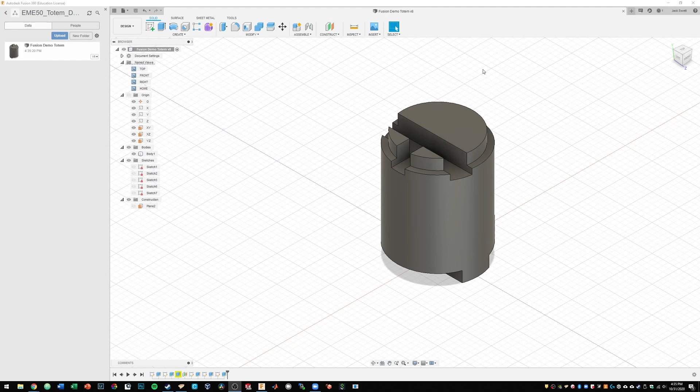We already have our part all set up, ready to go. Before we create the drawing, we know we want a north and south isometric view. Right now in our named views we have top, front, right, and our home view, which is actually a north end isometric view. However, we want to create a south end view, and we might want to use a slightly different isometric view as well, so in this case I'm going to use roughly this isometric view.

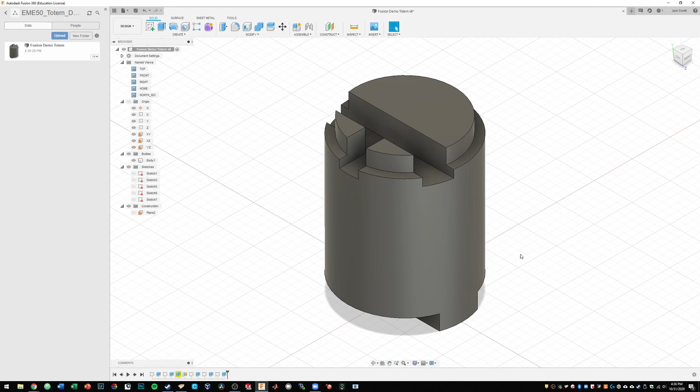To save this as a named view, we can go up here in the top right and click just this little blue corner, and that'll set us in a true isometric perspective. Now under named views we can right click, click new named view, and now we have this named view here. If we double click it, we can rename it to whatever we want. In this case, North ISO for the North Isometric view. You can also drag down and click the blue triangle down here to get us into our isometric perspective again.

Right click, new named view, double click, South ISO. Now we have our views set up.

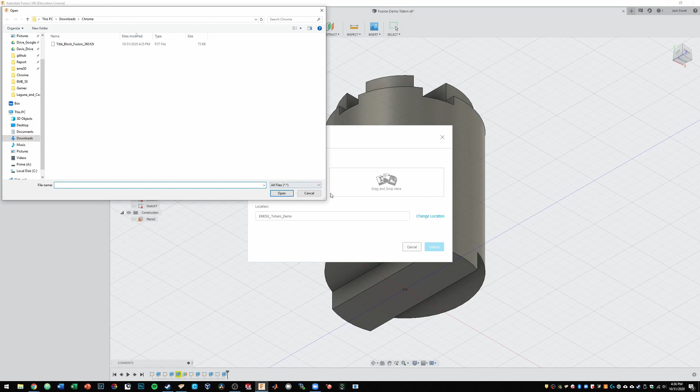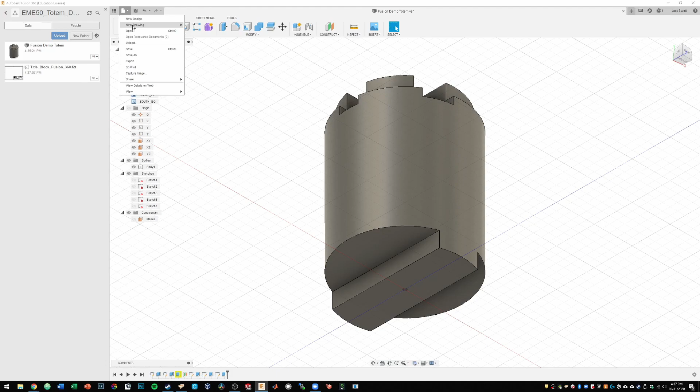It's time to import our template. We can open up the template that we will have downloaded, upload it. This uploads it to our project folder, so we can use it for anything in this project folder. Now you can see it here, that F2T file. Now if we go File, New Drawing from Design, under Template we want to select Title Block Fusion 360, hit Select, and you can see the standard units and sheet sizes taken care of for us.

Hit OK, and we end up here in our drawing. First thing we want to do is make sure we're on front, make sure we have visible and hidden edges selected, and we want to change our scale to 1:1.

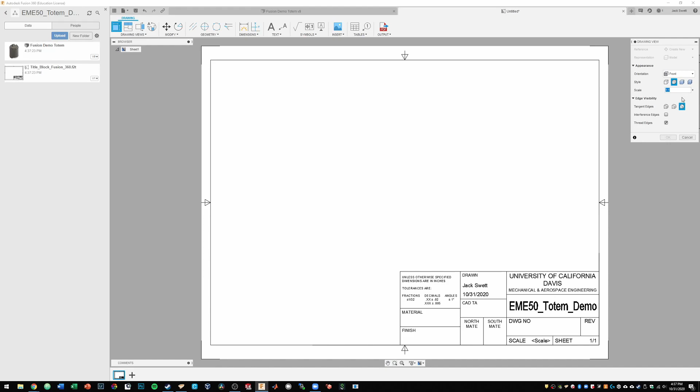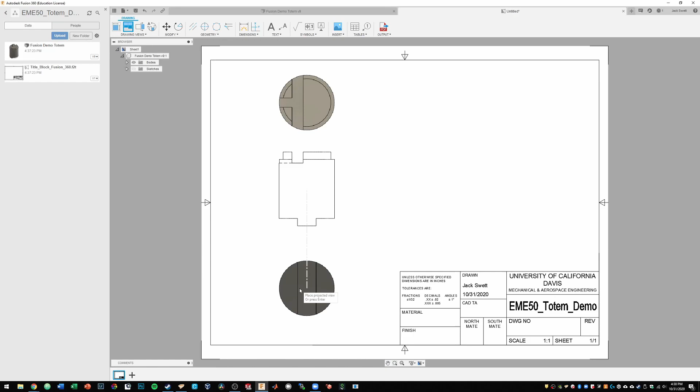Now we can plop down our view. You can see it looks good. Now we can go up here to projected view, or hit the letter P on the keyboard to get projected views. Click that view, and then just move your mouse up to get a north view, a south view, and then a side view. You can hit escape.

Now we want to add in our isometric views, so we can go back up, and from our model we can hit our north or south isometric view. Now you could have also just selected a southwest, southeast, northeast, northwest isometric view as well. However, I like having the named views as it just makes everything a little more clear.

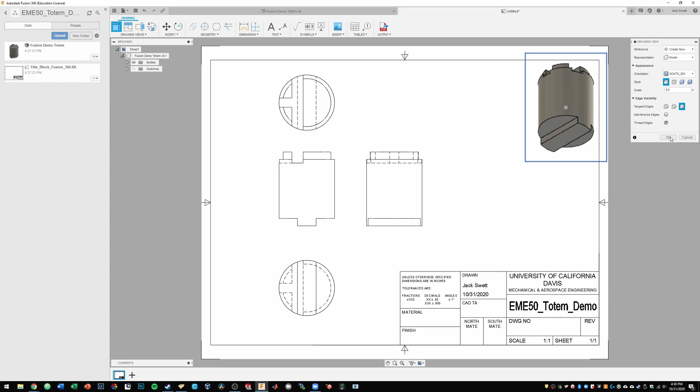So I'll take my south isometric view, and in this case for the isometric views we don't want to see any hidden lines, just to get an idea of what the overall part shape will look like. So we'll hit just visible edges, scale also 1:1. We'll put our south view up in the top right corner, and hit OK, and we'll do the exact same thing for the north view. We'll just line it up so that it's pretty closely lined up and hit OK. And now those are set.

Now we also see we have some hidden lines for features from the south end showing up on our north side, and likewise features from the north end showing up on the south end. And that just clutters things up a bit. So what we can do is right click this, hit Edit View, and from here, instead of having style from parent, we'll just click Visible Edges. We can close that and do the same for over here, Edit View, Visible Edges.

That cleans things up a bit, so now we can go ahead and start to fill out the dimensions and fill out our title block. To fill out the title block, it's pretty easy in Fusion 360. We can just double click it, and you can see there's already some placeholders for everything. So the material type, we'll double click and say 6061 T6 aluminum. Finish type, we'll just say none.

CAD TA name, you will enter whoever your CAD TA is. North and south mate, you'll enter whoever that is if you know it yet. Same with south mate. And your drawing number. And the revision that you're on.

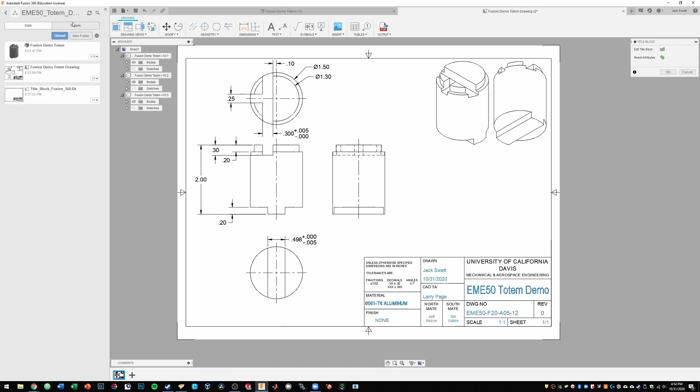Finally, if you want your name to not have any underscores in it, you can go in and edit your totem name here. Right now with the template, the way it's set up is it just defaults to the name of your project, but you can change it to whatever you want.

So once the title block's all filled out, you can select OK, and everything's good to go from there.

Now it's time to add some center marks and center lines. If we go up to center mark and click one of our circles, we can see that it doesn't have center marks extended all the way through the part, which is what we want in this case. If that happens in Fusion 360, the easiest way to get around it is to use center mark pattern.

When you select this, you can create a center mark, and I just move my mouse so it's up on top, vertical. Hit enter, and there we have it. Easy as that. Do the same thing down here. Now we have the center marks set.

For the center lines, we just want to click the outer sides of the cylinders, and you can see the center lines don't extend all the way through the part. We want them to, so we click the center line and drag the arrow on the end so it comes through the part for both the top and the bottom, making sure they're roughly equal. Now those are set.

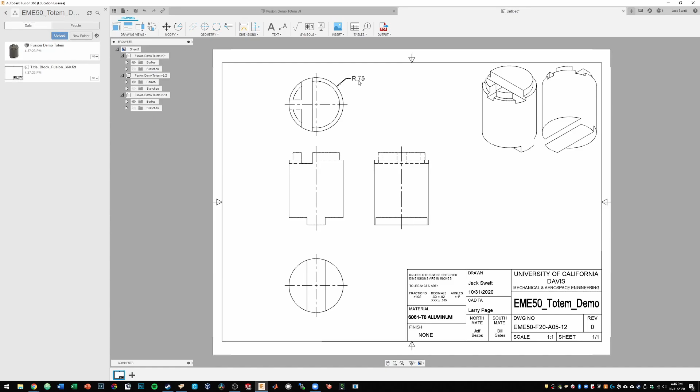When we come to dimension the outer edge of this totem piece, you can see that when we click it, we end up with this radius. Radius isn't really great for the outside diameter of the entire totem, and typically we only want to use it if we have less than about half a circle.

Instead of that dimension, we can come up here and hit diameter dimension. Regular dimension will just do what it thinks is best, but we can override that to a diameter dimension. We can click that and place it down. Same with this one.

Now you can see it's dropping the trailing zeros, which is an easy enough problem to fix. Down here at the bottom we have annotation settings, and we can display leading zeros and display trailing zeros. I'll just select display trailing zeros for this.

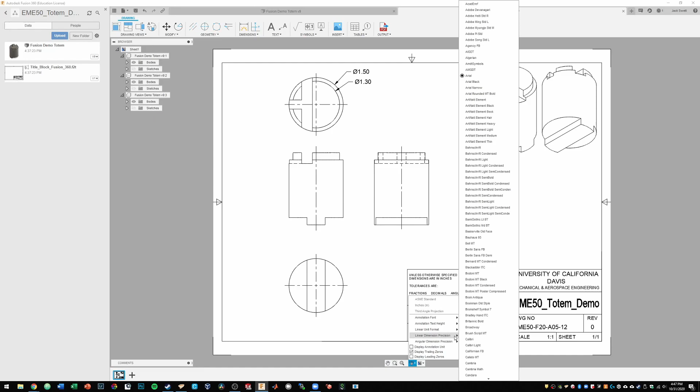If you find it's showing too many decimal places, we can go up here to linear dimension precision and select whatever we want - 3 decimal places, 2 decimal places, 1 decimal place, whatever we need. So that's how we can set that.

Now we just have to dimension the rest of our part. Start off with some easy ones here.

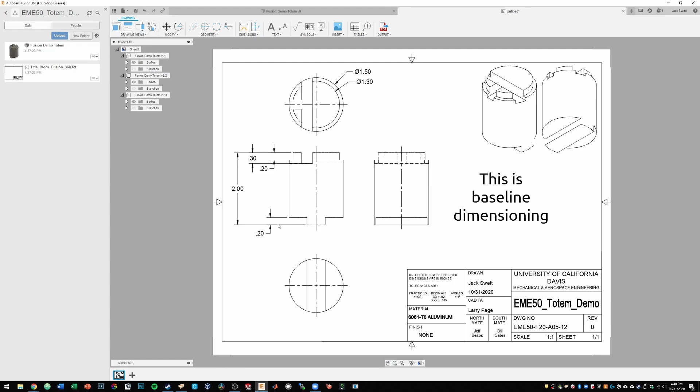When you're dimensioning the part, what we want you to do for these assignments is dimension all features on the north end referenced off of the top surface of the totem, and all features on the south end referenced from the bottom. So you can see that's what I've done here. Now we can keep on dimensioning everything.

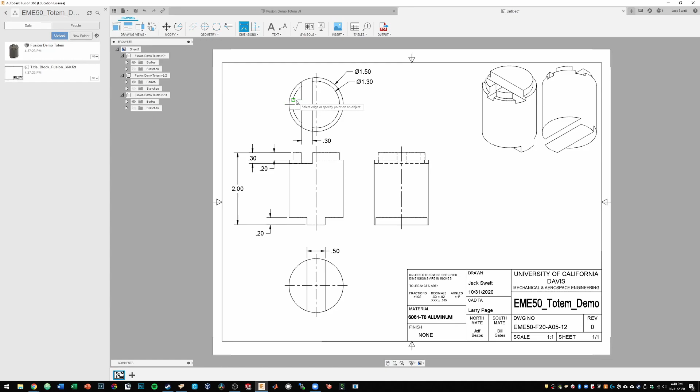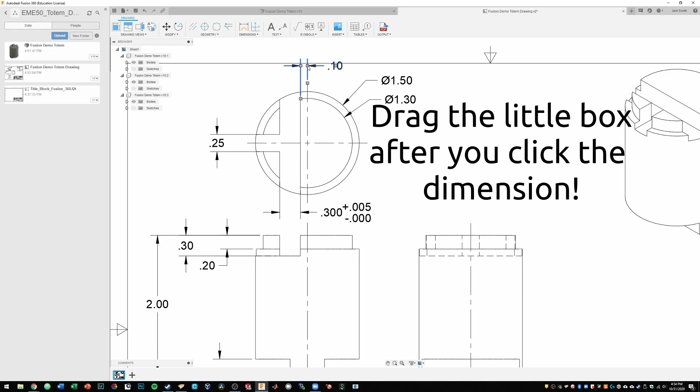Now it looks like we're missing one dimension here, from there to there. One thing to keep in mind is we never want dimensions to extend out past this, so you can click that dimension and drag it down to be within the box of the drawing.

We're going to have this 0.30 dimension be our precision fit, so to do so, have it be a 3 decimal place precision fit. We click it and double click it, and now we have this selected. Over here on the right, we want to change primary precision to 3 decimal places. Under the tolerance tab, we want type to be deviation.

Now our upper tolerance, since this is a gap, we want it to be no smaller than this. So the tolerance should be plus 5 thousandths, minus 0. We can close that, and now we can see the precision fit has been applied correctly.

Before we get too much further, it's always a good idea to save, so we can go ahead and do that. Now we can do the same thing for the precision fit on the south end.

You can see it's at 0.50 right now. If we double click it and change precision to 3 decimal places, you'll see it's actually 0.498. That's because at max material condition, we want this piece to be no larger than 0.498, to give at least a 2 thousandths allowance, so there'll always be a 2 thousandths gap even at the extreme end of the tolerance.

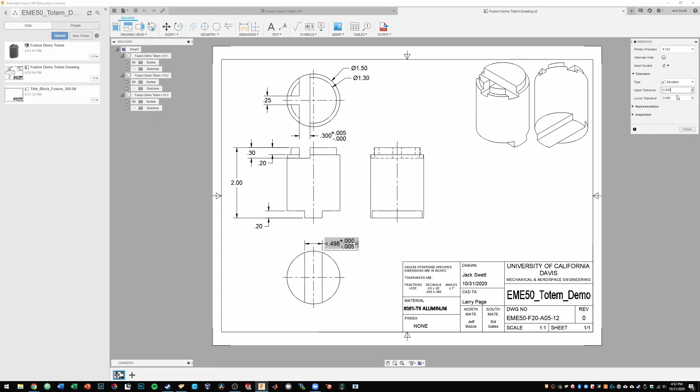Okay, so now that our drawing is done, we want to either print it or output it as a PDF. Instead of going to File, Save, Save As, up here on this bar we actually have an Output PDF option, and we can click that to save the file as a PDF and open it from there.

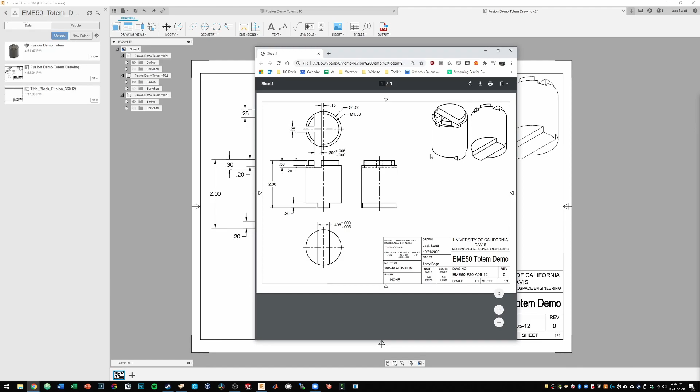So now we can open it as a PDF, and we have a nice PDF that we can print out or upload anywhere we wish.